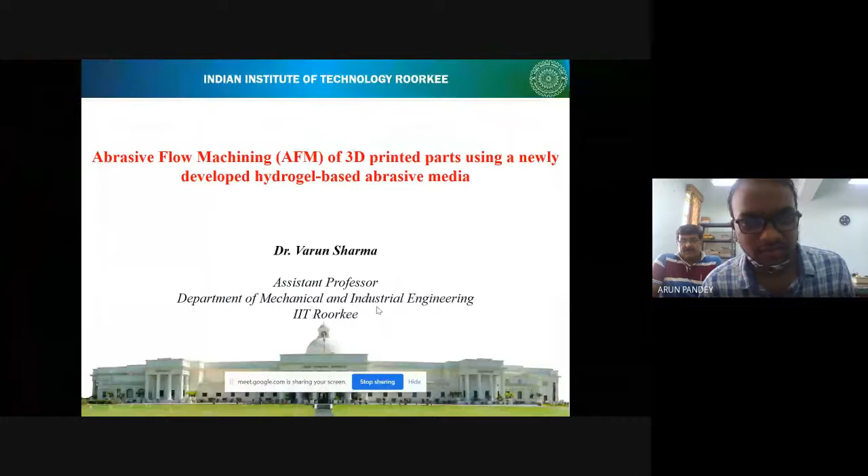The topic I have taken up for this FDP is abrasive flow machining of 3D printed parts using a newly developed hydrogel-based abrasive media. This is a topic on which we have got 2 patents. I will first discuss what abrasive flow machining basically is, how material removal occurs, and what have been the different variants and process parameters in AFM. Then I'll discuss what our guiding force was in developing the abrasive media, and how we were able to achieve a better surface finish for 3D printed parts. That will be a case study I will discuss.

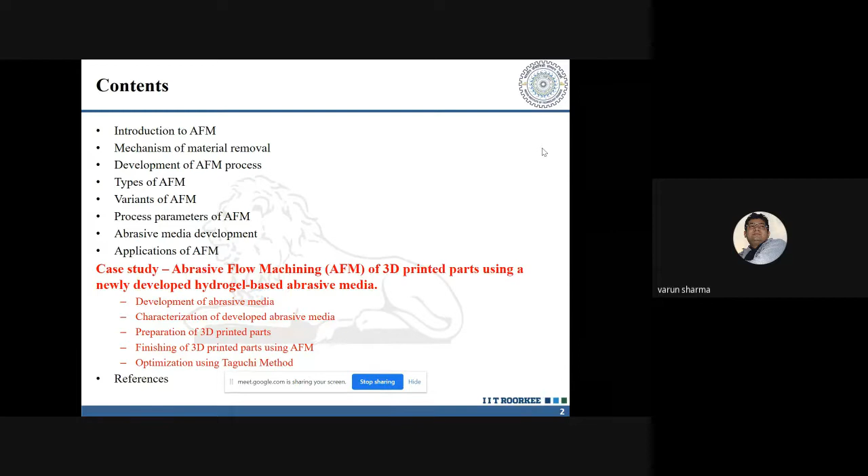Starting with it, as we all know, abrasive flow machining is one of the non-conventional machining processes in which we get the desired surface finish either at a micron or nano level. There are a number of parameters that play a significant role in selecting what kind of surface finish we are going to have. Finishing is generally taken up at the last leg of the manufacturing cycle, and this is the most significant step as it determines the surface integrity, the fatigue life of your specimen, and the performance of that particular object for its actual usage.

So till date, there have been a number of conventional finishing processes used, like grinding, honing, lapping, but they all had some limitations in the finishing of free form surfaces. They were mostly used when finishing cylindrical or simple shapes.

Like I am having certain disturbance, someone's webcam, or I think so, audio is on. Is it with me only?

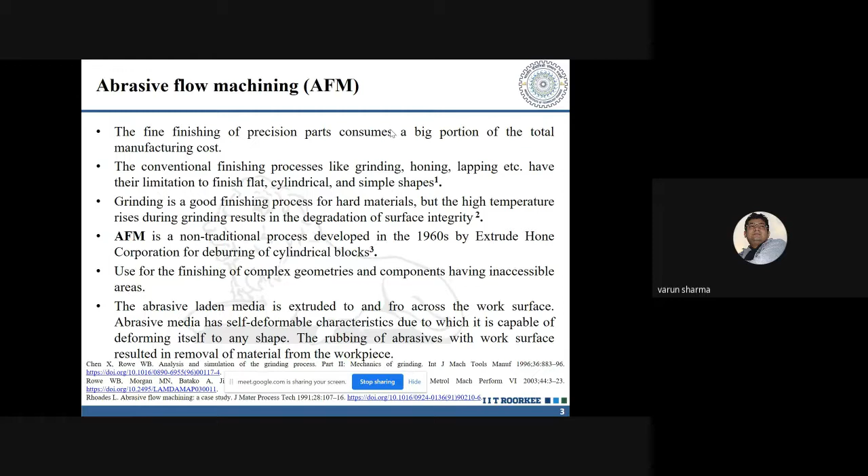With this particular process, the abrasive particle gets the freedom to take any kind of shape. The media we use is deformable in nature, which was not the case for grinding, honing, and lapping. When this media comes in contact with the workpiece, material removal starts using micro ploughing and micro cutting operations.

That abrasive media is viscous enough that it can change its shape. Primarily the abrasive medias used till date were all rubber-based, either natural rubber or synthetic rubbers. In those rubbers, you embed abrasives of a particular mesh size, density, and shape.

When that abrasive media moves from the upper cylinder to the lower cylinder, which holds a fixture, whatever is the shape of your workpiece - cylindrical, free form, or any other shape - the abrasive media creates a ploughing action, a micro ploughing or micro shearing action, and the material removal takes place at the micron level.

During this process, in a two-way AFM, the abrasive media moves from the upper end to the lower end, then from the lower end back to the upper end. So there are a number of strokes being used.

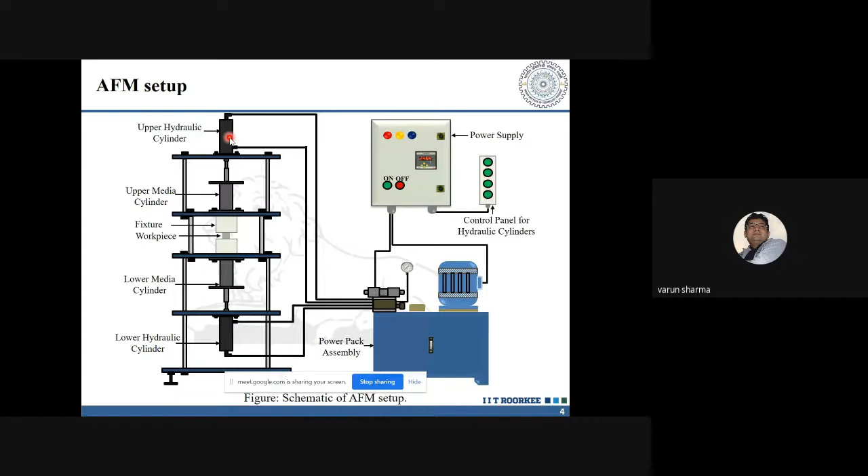The mechanism of material removal involves loose abrasive particles. Some of these particles move towards the center, and some impinge against the workpiece. So we classify the abrasive particles as active and inactive abrasive particles. When this abrasive media passes through the cylindrical surfaces, the portion that actually gets in contact with the workpiece is categorized as the active abrasive particles.

This active abrasive particle is subjected to two different kinds of forces. The first is a normal force that tries to embed the abrasive particle into the workpiece, and the other is the axial force, which is governed by the movement of the abrasive media from the upper cylinder to the lower cylinder.

During this normal force and axial force, certain debris will come up, which we call micro debris, and that debris gets into the abrasive media itself. This debris will be directly proportional to the normal force that the abrasive particle has with the workpiece.

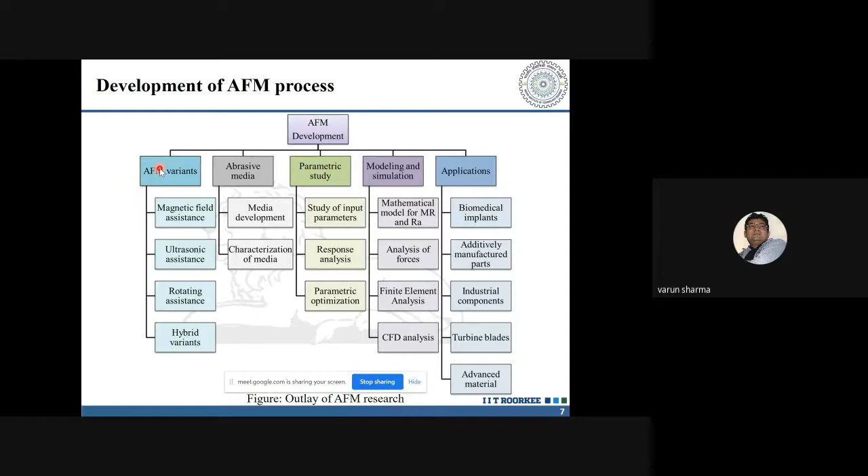So the problem we took up is that we wanted a certain finishing process for an additively manufactured material, and we wanted the surface finish suitable for the practical use of that object. So for the additively manufactured part, we developed specialized media, and we developed a certain variant for getting the desired surface finish.

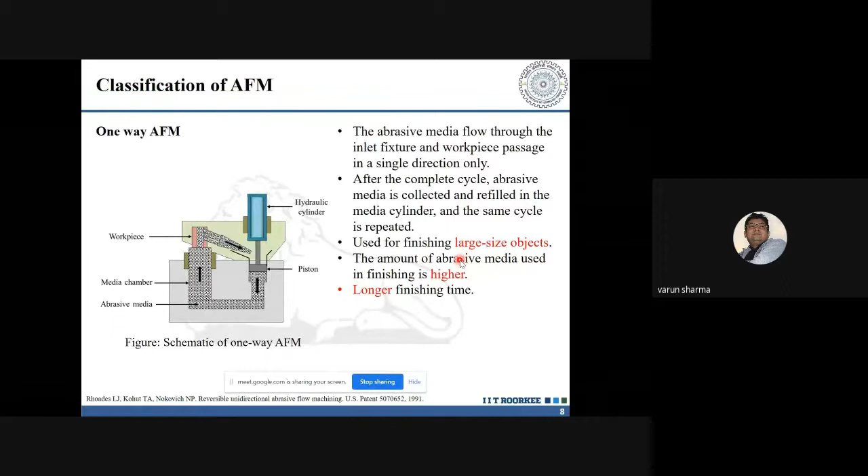Even if you have smaller sized work materials, as we had in our case of 3D printing, for complex design.

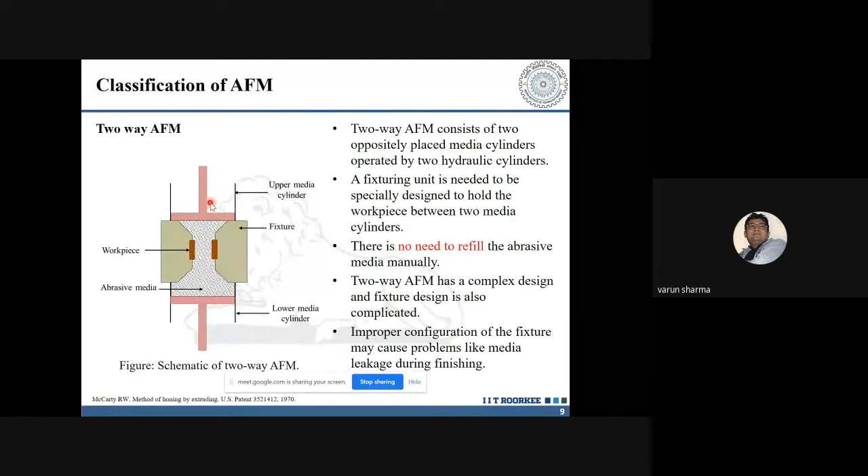However, the problem here is that there could be certain abrasives that can leak out from this process if the fixture you have designed is not appropriate.

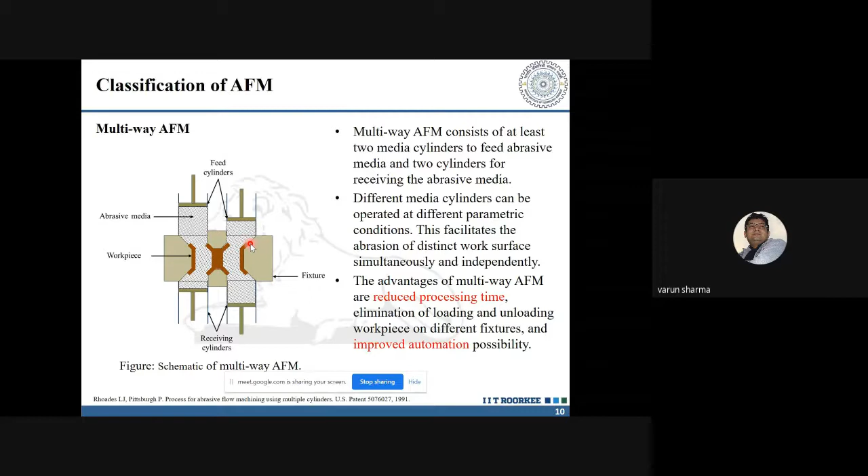Now, to increase the processing, you could use multi-way AFM, a number of cylinders that can be operated simultaneously as well as independently. This was used when we wanted to go for mass production.

Then there was another idea taken into consideration. What they wanted is that whatever inactive abrasive grains are there should also become active. Now, how can they become active? For that, they provided orbital vibrations to the workpiece. When those orbital vibrations were provided, the abrasive media gets churned up, and whatever was inactive abrasive also becomes active abrasive particles.

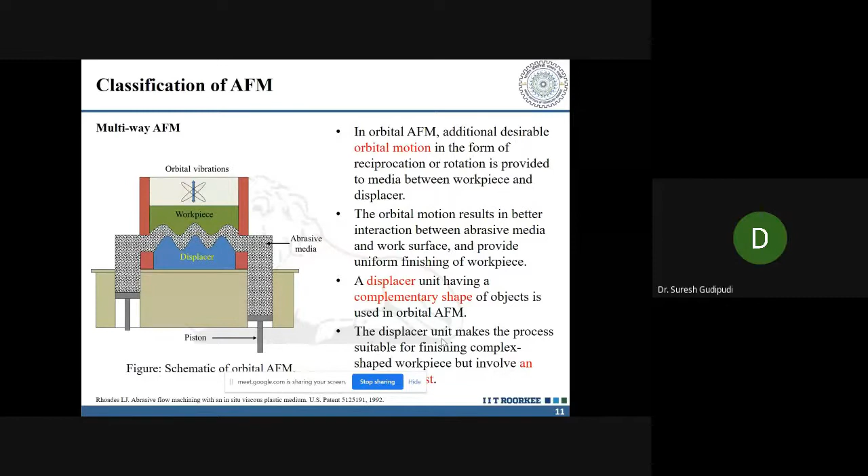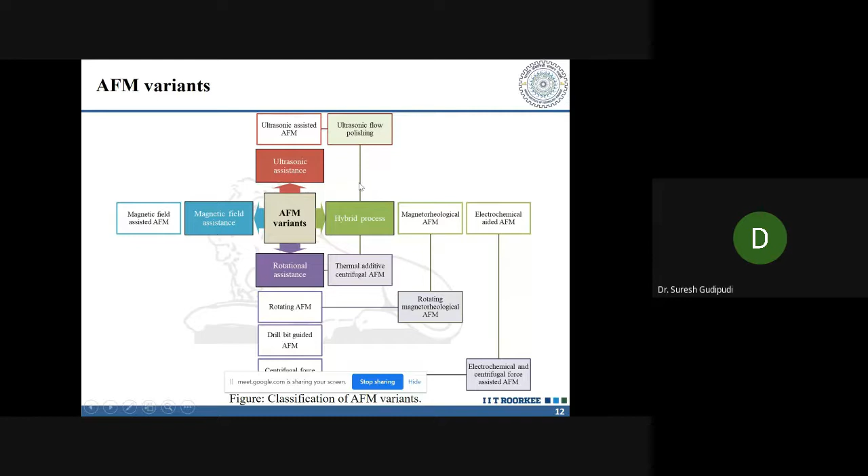Okay, so over here, what we were discussing is that there has been a number of variants of the AFM that has been developed.

For example, there has been certain ultrasonic assistance that has been provided to the workpiece. This ultrasonic assistance helped in creating a more impact of the abrasive particle into the process. So that was called an ultrasonic assisted AFM.

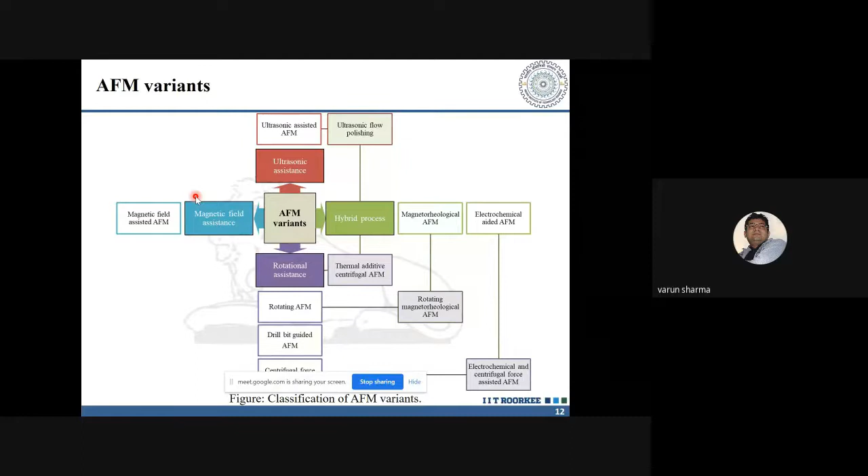There has been certain magnetic field assistance provided. That magnetic field assistance helps in pulling up the abrasive particles towards the workpiece. It creates a more normal force, and the process was called magnetic field assisted AFM.

There was certain rotational assistance provided to make the inactive abrasive particles also active. It helps in creating a churning action in the abrasive media. So that rotational assistance, we call it rotating AFM.

This rotating AFM had different ways. I can churn up that particular media using a number of processes. We used drill bits, which also provided a centrifugal force. So we were having certain centrifugal force assisted AFM also.

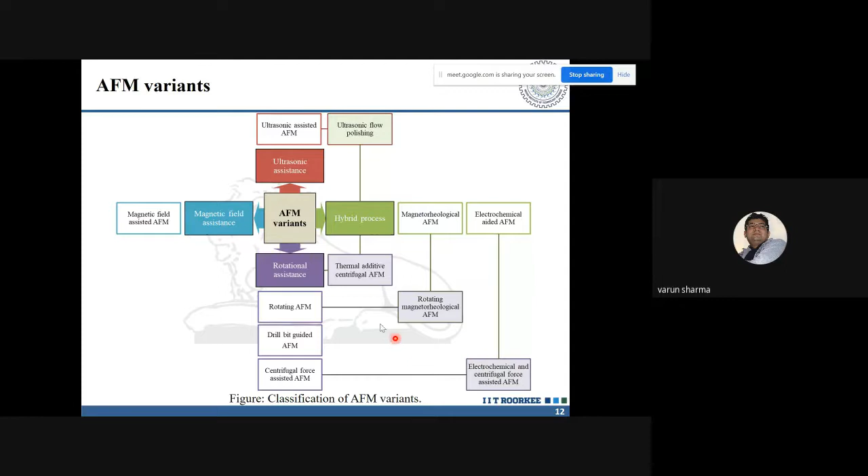Besides that, we combined certain rotational assistance with ultrasonic assistance. These two combined assistances we called hybrid processes. These hybrid processes were different - magnetorheological AFM, electrochemical aided AFM. So there were two or more combinations of separate processes combined with each other, and all these variants came into existence.

Now moving on to slide number 13. Over here, to make sure the abrasive particle creates more indenting force, we had certain piezoelectric actuators, which provide vibrations of the order of 5 to 10 microns, and the frequency was of the order of 20 to 25 kilohertz.

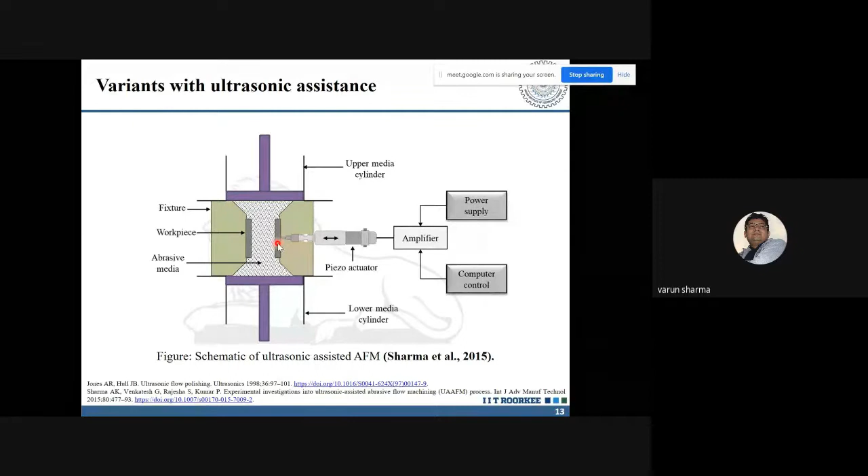With those high intense vibrations of relatively smaller amplitude, when the workpiece starts vibrating, it gets in contact with a number of abrasive particles, and when it gets in contact, the material removal rate increases in the similar manner.

Other than that, to increase the magnetic assistance or provide magnetic assistance, we provide certain electromagnets towards the boundary. Once you provide these electromagnets, whatever abrasive particles you are using, that will not be like only alumina or only silica.

No, it will also be having certain iron particles in it. So what those iron particles do is, under the effect of the magnetic field, those iron particles get pulled towards this electromagnet, and it creates the material removal at this particular end.

Now, by varying the intensity of that electromagnet, by varying the electric current, you can create a variation in the indentation of that abrasive particle against the workpiece.

So one way was going for an electromagnet. The other way was using a number of permanent magnets, which were being rotated. When they were rotated using a belt drive, it creates a churning action, or it creates a rotational motion into the abrasive media.

Another variant was the magnetorheological abrasive flow machining, in which we were using certain CIP chains. These CIP chains align themselves from north to south pole, and whatever abrasive particles are entrapped over here, that helps in creating the micro cutting and micro ploughing operations.

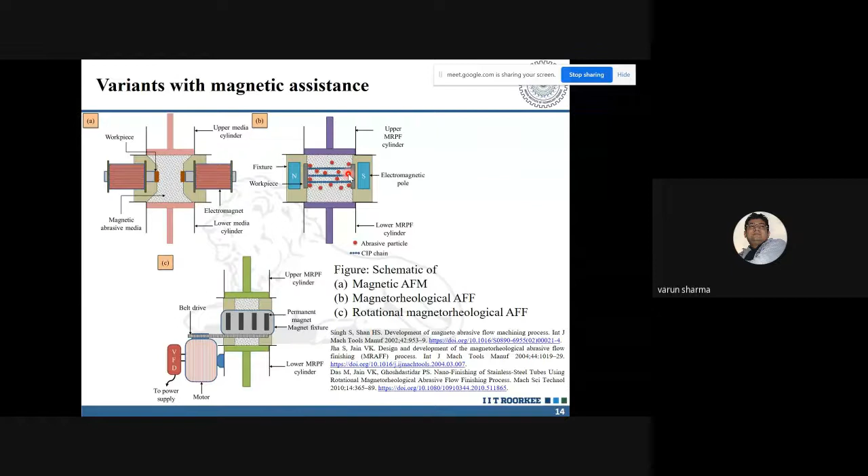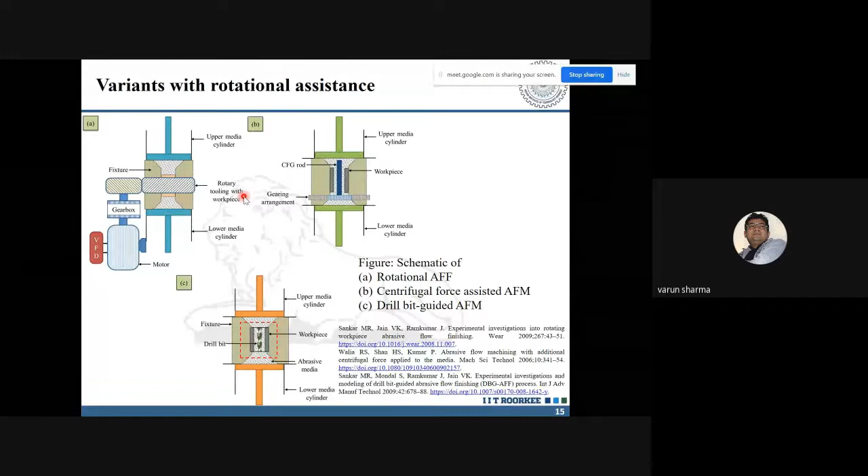Now, if I am working with any particular variant of the AFM, with the same variant, if I increase my number, if I change my abrasive concentration, mesh size, or similar, I can have different kinds of the micron or nanoscale results in that particular case.

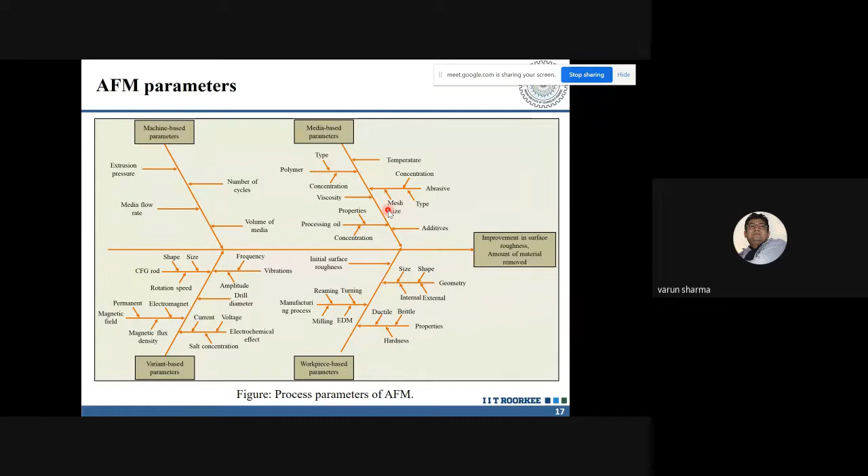So first we are going to discuss abrasive media development. This is from one of our articles from the Journal of Manufacturing Processes. So what kind of abrasive media do you want for your particular process? It was generally rubber based or natural polymer based.

Whatever media you have developed needs to be characterized before it goes for the final set of experimentation. There are different categories of media characterization techniques used: FTIR analysis, SEM analysis, TG analysis, heat transfer coefficient, amplitude sweep test, viscosity variation with temperature, flow test, and creep behavior of that abrasive.

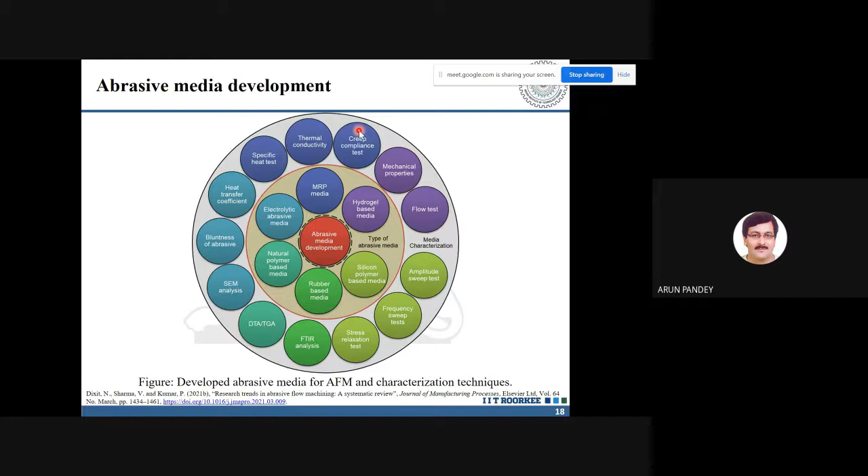Okay, now click. So this is the surface finish before the AFM, and this is the surface finish that you could achieve after.

What you can see here is that the furrow marks that were present were easily flattened out using this particular process.

Now, when the abrasive media travels from the upper cylinder to the lower cylinder, what it does is create certain marks.

If you are doing the finishing using grinding, what you will see is that the furrows created will be very sharp, so there will be certain plastic deformation of the material as it moves from that particular furrow.

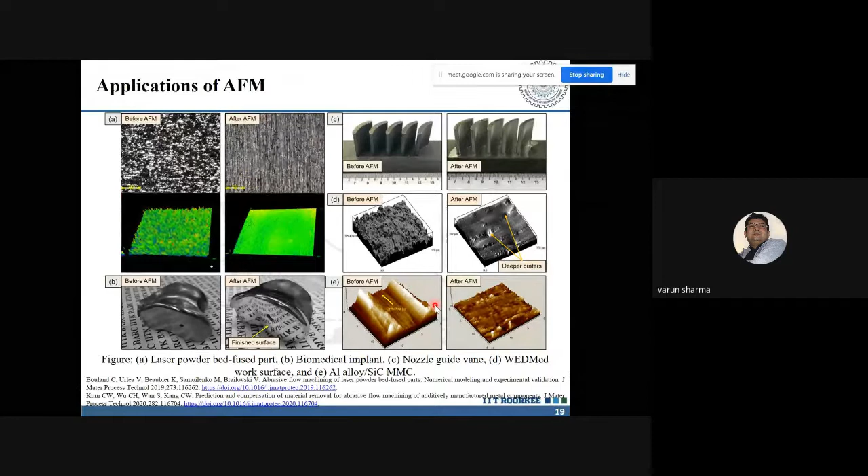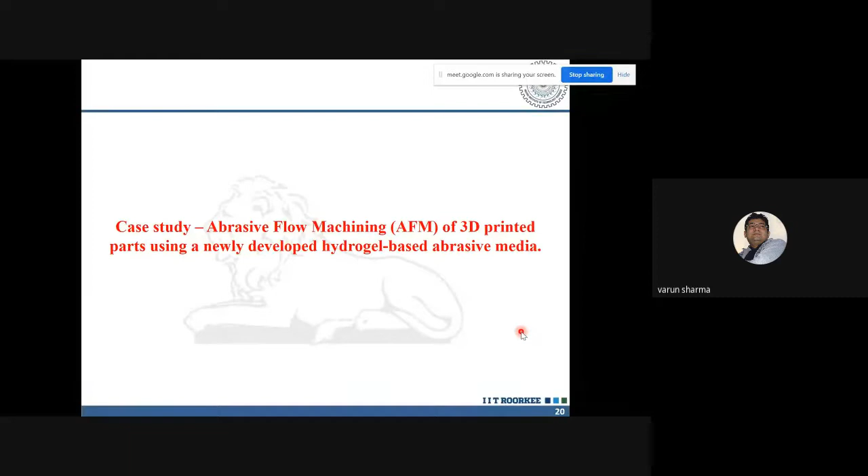That sideways movement of the material was suppressed when working with the abrasive flow machining process. Now, our target was, taking all these things into consideration, how could we go for the abrasive flow machining of 3D printed parts?

This is the schematic of the work we did here. The problem with additive manufacturing is, no doubt, it can be used for manufacturing free-form surfaces, but there has been one inherent error of additive manufacturing, and that error is called the staircase effect.

If you are creating an object which is cylindrical in shape, the staircase effect will be less. But let's say you are fabricating an object which has a dome shaped surface, like the shape of the object I have to create.

Once you create it using additive manufacturing, it is the stacking of layers one over the other. Let's say this is my first layer that I am stacking, this is my second layer, and this is the third layer.

What you will see is that the actual object you create will have a movement of layers in this particular manner, resembling a staircase towards these edges. So your desired surface was this dome shape, but once you stack up your layers one over the other, what you get is this kind of staircase effect.

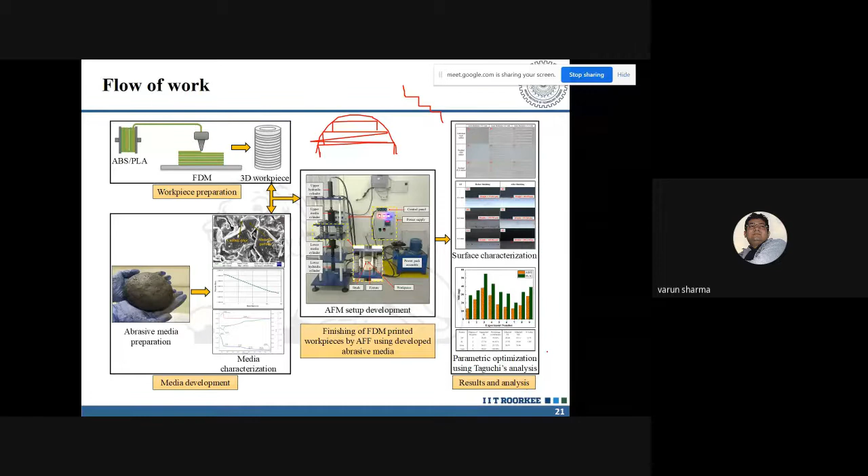Now what we did is we first developed our abrasive media. We characterized that particular abrasive media on an in-house built setup, and then characterized that particular thing using different characterization methodology. This paper we published successfully in Rapid Prototyping Journal.

The first and foremost thing that came into our mind was that we have to create a self-deformable abrasive flow media. Now when it comes to the self-deformable abrasive flow media, as I discussed earlier when we were discussing the classification, rubber was being primarily used. Now the manufacturing of that rubber-based abrasive media is itself polluting in nature.

It requires a certain setup, a hot air oven in which you can melt your abrasive rubber. Then you have to embed it, then you have to mix it manually. So that was all a very tedious task. No doubt it gave you a certain semi-solid mixture of the polymers and the abrasives.

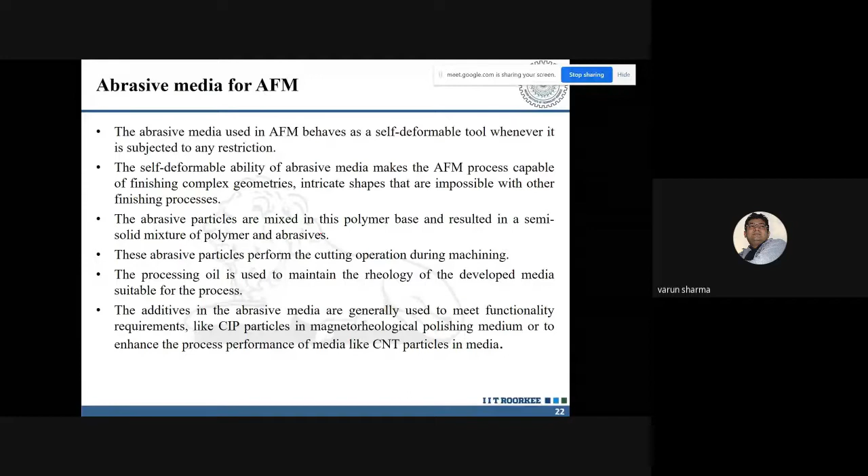But whatever this particular abrasive media is, it undergoes shear thinning when it goes to 200 cycles, 300 cycles. Slowly and slowly, the abrasive holding tendency of that particular media gets decreased, and this particular media needs to be replaced, cannot be reused again and again.

So the problem with the conventional method is that you require heating of the polymer, which requires furnaces. Also, it was human intensive, and the high temperature was not safe for human labor. Besides that, environmental issues arose because fumes were being released, and it was also a time consuming process. It will take around 6 to 7 hours to develop the desired viscous abrasive media using natural or synthetic rubber. Also, whatever debris is created during the process will come into the abrasive media.

So let's say you have gone for 300 cycles or 600 cycles, your media is not pure. Your media will have certain kinds of debris that have come from the workpiece. So you have to change your abrasive media because it has certain blunt abrasives and also a kind of debris, which was again costly. So I cannot change my abrasive media after 300 or 600 cycles easily if I'm going to go for production.

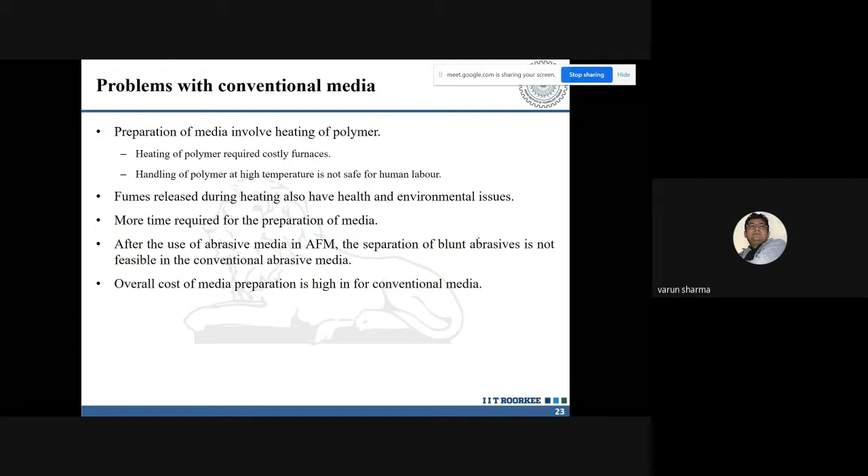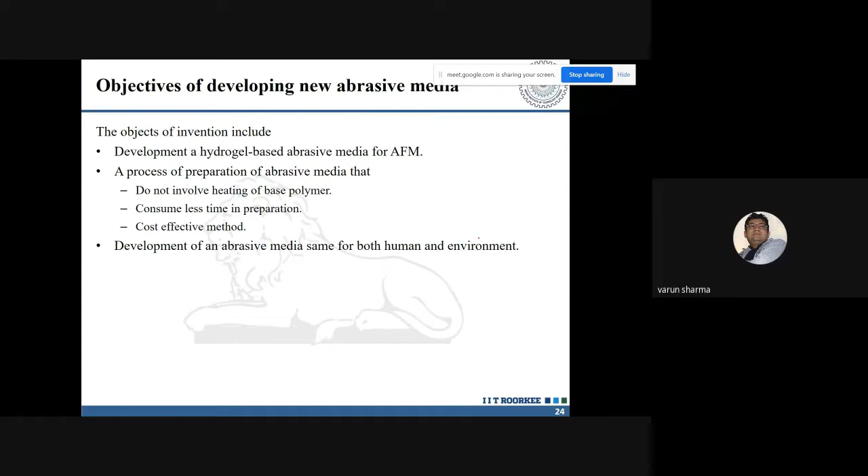So taking all these things into consideration, the objective was to develop a hydrogel based abrasive flow medium — a media which does not involve heating, requires less time to prepare, and is cost effective and safe, not only for the human but also for the environment.

So taking that into account, for the media development we used xanthan gum. It is biodegradable, biocompatible, and has good strength. Now, to make sure that this xanthan gum cross-links nicely, we used a cross-linking agent called locust bean gum. It was not having the desired kind of viscosity to hold up the abrasive particles, so we used fumed silica to give it the desired thickness, and then we went on to mixing the abrasive particles into that particular fabricated abrasive media.

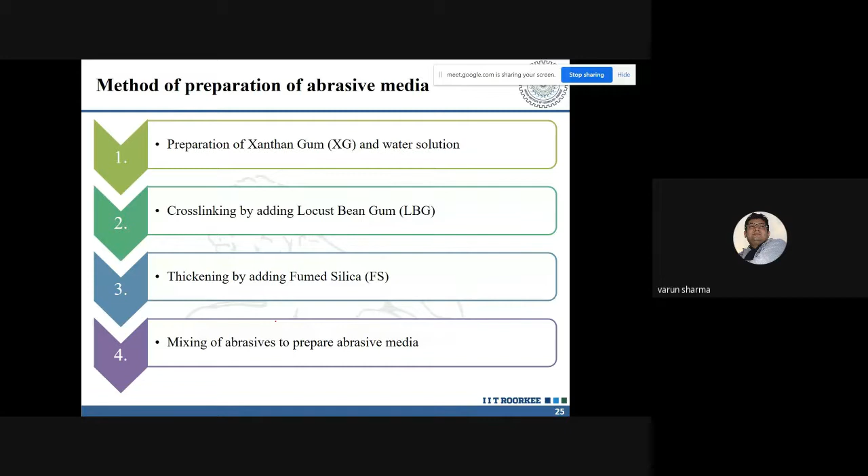Now, before using it for the actual material removal, because if I have to achieve a micron or nano level surface finish, my abrasive media should be held at a certain temperature for a longer duration, to make sure we characterize this particular media — because only then could we attain a micron or nano level surface finish for the 3D printed object.

We tried to characterize it using 5 different constituents. The case was that we used xanthan gum, locust bean gum, fumed silica, and water to have the desired constituents.

Now, to determine the rheology, we went for the amplitude and frequency sweep test. What we found is that as the shear rate increased, the viscosity decreased. That was what we were expecting, and it was characterized due to the shear thinning behavior of that particular abrasive media. This shear thinning was on a higher end compared to the conventional natural rubber media that we were developing.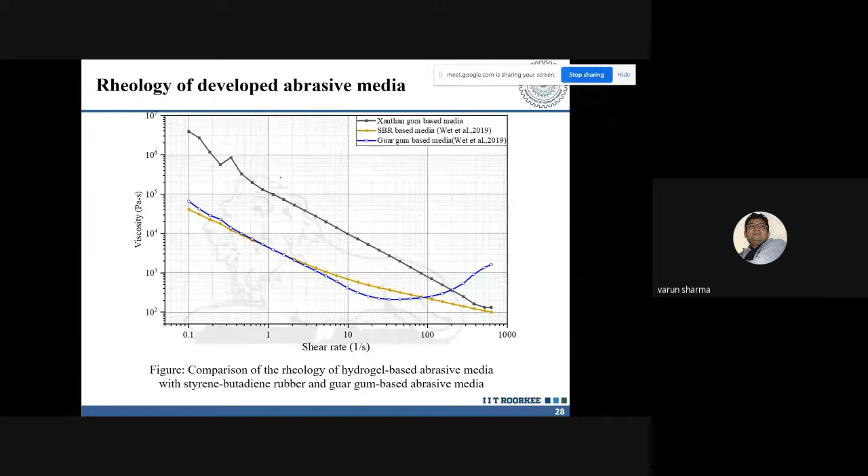Now, as compared to all this, the viscosity for our media was higher. Because the viscosity in our case was higher, we took into consideration that this is the media that can have a better cross-linking, and can help in a better material removal process. So rheologically, this was the best media that has been developed in the literature. That was the reason we patented this particular media.

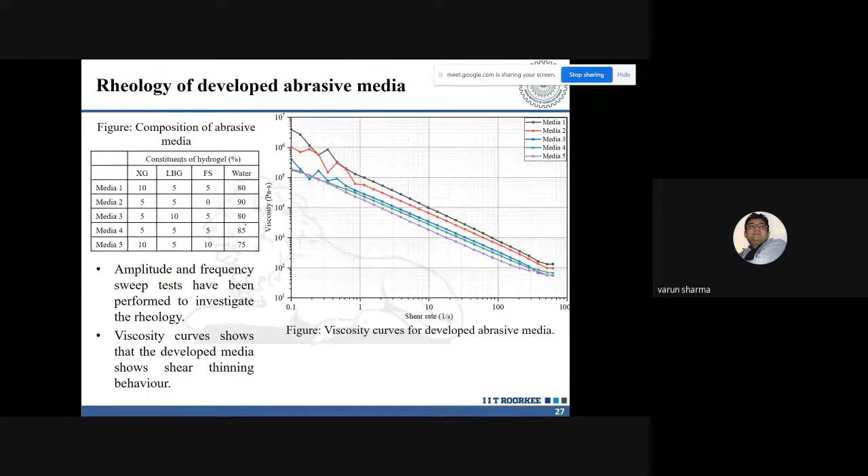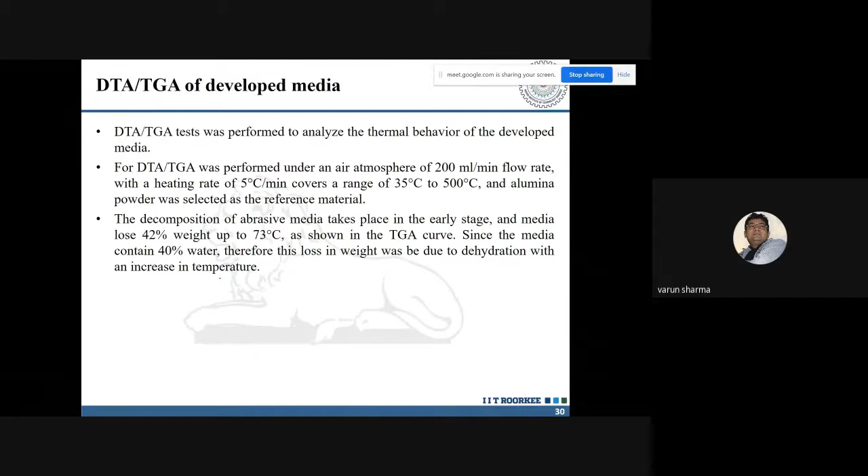So these presences resulted in an elastic nature of the polymer based abrasive media. Now this elastic nature is one of the desired properties from the abrasive media, because it gave it the desired deformable characteristics so that it can get the desired surface.

So the advantageous features of this particular abrasive media is that it is stable for the operational temperature range of the AFM. The viscosity of the abrasive media was higher than that of the conventionally used media. So whether you are going to get the desired finish in titanium or relatively softer materials like ABS or PLA based material, this particular abrasive media can be used. There was no use of furnaces, no use of manual labor, so it is safe for use as well as environmentally friendly. There is no costly equipment required. The rheological properties are similar to, rather better than, that of the conventional case.

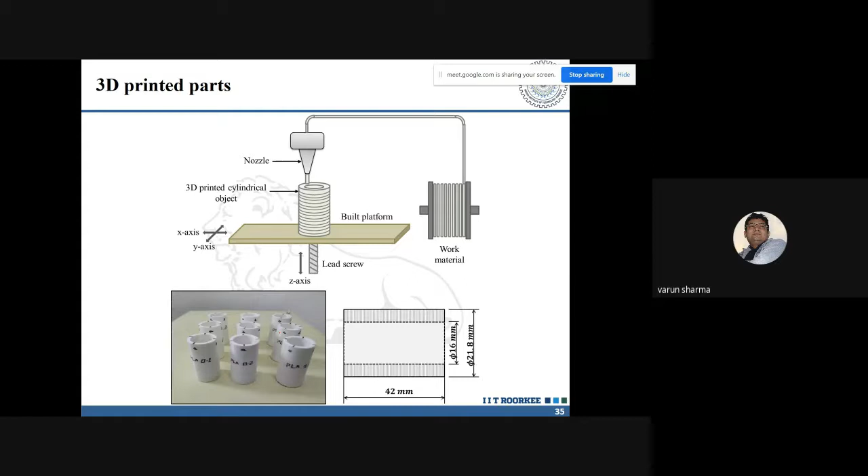So one idea was to get up this particular 3D printed part, using the same kind of schematic setup we used earlier. Now there are different parameters that we tried to optimize. For example, we went for different parameters: the layer thickness, extrusion temperature, extrusion pressure, and the abrasive concentration.

Now, the layer thickness that we varied was from 0.1 to 0.2 to 0.3. For 0.3, there was more staircase effect. For 0.1, there was less staircase effect. So if the workpiece I am going to finish has a higher staircase effect at the initial level, the percentage improvement in surface finish will also be on the higher side.

The extrusion pressure we varied from 60 to 100. This helped in creating a variation in the axial forces by which the abrasive particles moved from the upper cylinder to the lower cylinder. And there was an abrasive concentration. Now, we have not used any magnetic assistance, none of the ultrasonic assistance. It is simply pure abrasive particles that have been used.

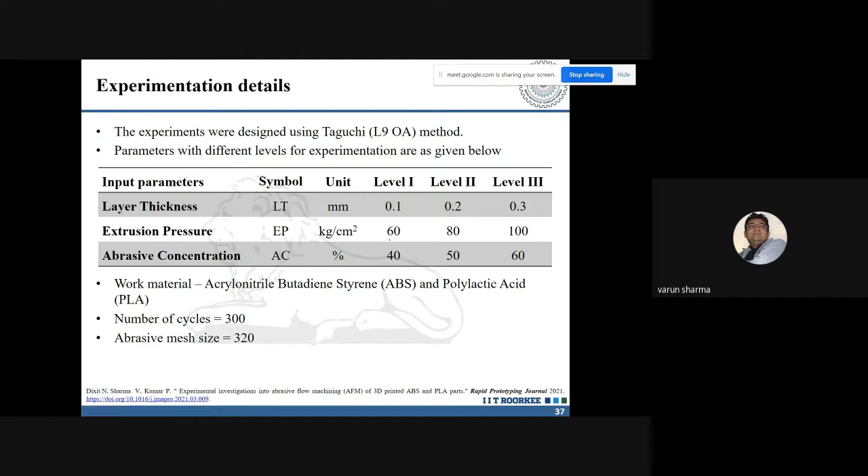Now, if your abrasive particle concentration is on the higher side, let's say I move from 40 to 50 to 60, it is not going to give you any particular benefit. So all these parameters were selected through pilot experimentation, and an L9 orthogonal array was made up.

Through this, the process output that we took was the material removal. Mind it, we did not take the material removal rate here—it is the material that has been removed from the workpiece. That is, initial weight of the sample minus final weight of the sample, and whatever the difference is, that has gone into the abrasive media, because it became part of the medium moving from the upper cylinder to the lower cylinder.

The other output was the percentage improvement in surface finish, calculated as initial surface finish minus final, divided by initial, into 100. Now, the reason we don't measure the final surface finish alone and report it that way is because it depends upon a number of parameters. For example, if my initial layer thickness is 0.3, I will have more scope to remove material. If my initial layer thickness is 0.1, the staircase effect would be less, and I will have lesser scope for material removal for the same abrasive media.

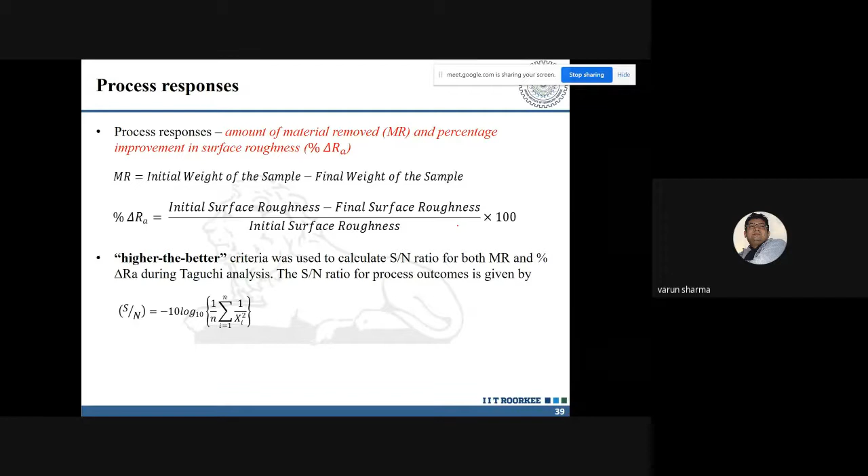So we want both: material removal should be higher, and the percentage improvement should also be higher. So for the Taguchi method, we went for a 'higher is better' kind of approach, and these were the characterizations for the different sets of work materials, that is for ABS as well as for PLA.

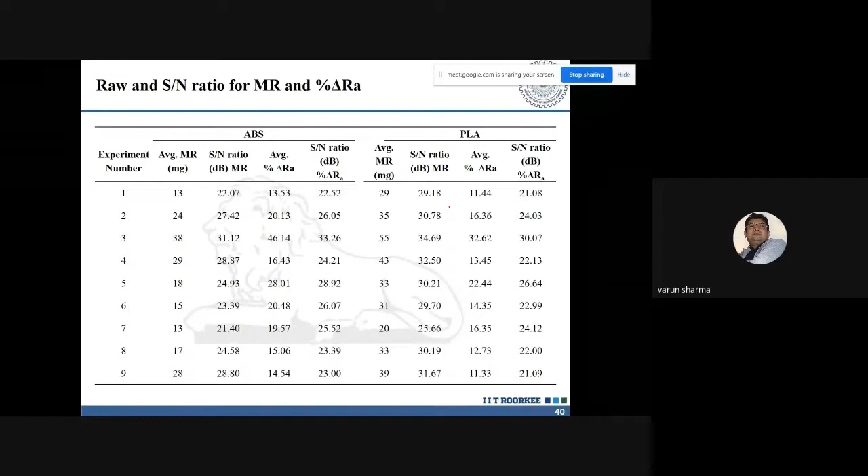What you could see from here is that as compared to ABS, the average material removal was higher for the same set of experimentation for PLA, because it was relatively softer in nature. However, there was a contradictory experience, and that contradiction came up on the average surface roughness, which was higher in case of ABS and lower for the similar set of parameters in case of PLA. So what is happening in the process?

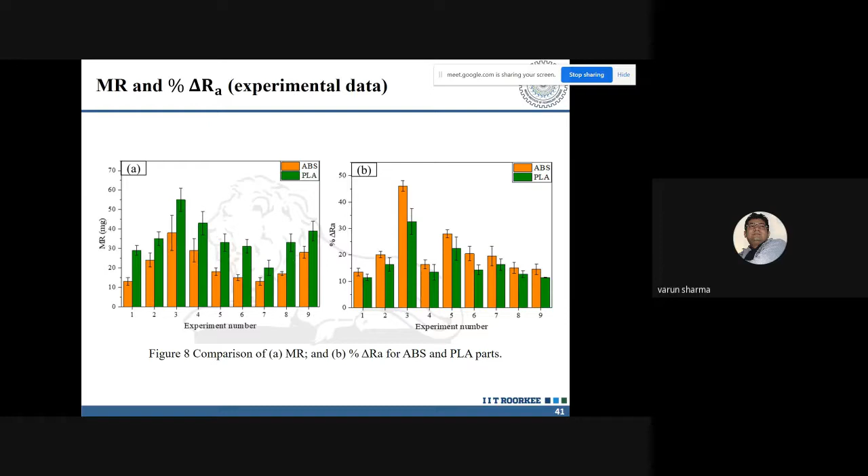For all these sets of experimentation, you see that the material removal rate was higher in case of PLA. For some parameters it is less, for some it is more. It was best for condition 3.

Now just look at the cross-sectional view of the surface finish. For the layer thickness of 0.1 mm, the consecutive layer thickness is 100 microns. Over here it is 201 microns, that was for 0.2 mm, and over here it was 301 microns for the 0.3 mm layer thickness.

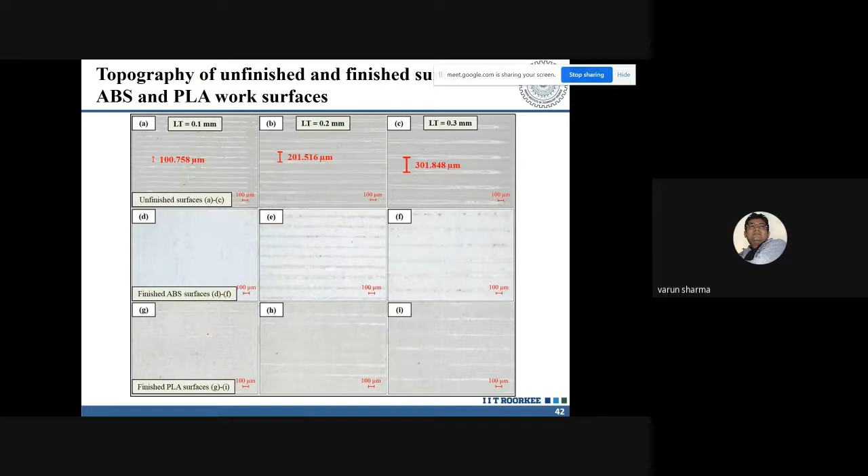Now as you moved for the ABS, you see that whatever furrows were easily visible here have already gone away. For 0.2 it was less, for 0.3 they were still visible. So for the 0.1 mm layer thickness, a better surface finish has been achieved for the ABS as well. Now when you look towards the cross-sectional view, see over here that this is the material that was being stacked.

That material was being stacked in the form of domes, this kind of shapes were being there. Like this was first layer, second layer, third layer. So what we were having is we were stacking up these particular domes over the other, from a reference line.

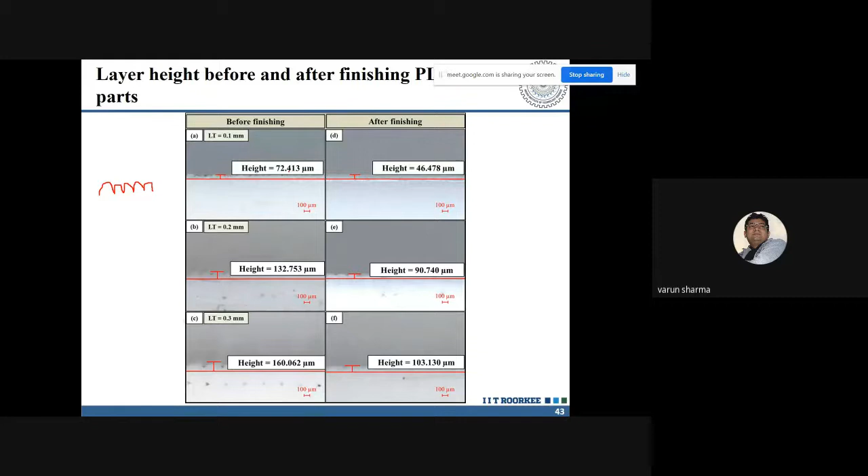Now this particular stacking was 72 microns. As the material removal occurred, some portion of the domes was being withered away, eroded with the abrasive particles. So we were able to reduce this particular height from 72 to 46 microns. For layer thickness 0.2, from 132 to 90 microns, and for 0.3 from 160 to 103 microns, you were able to reduce for the PLA finishing.

So if we look towards this particular input, that were 3: the layer thickness, extrusion pressure, and abrasive concentration. Now this particular increase in the layer thickness resulted in more surface irregularities.

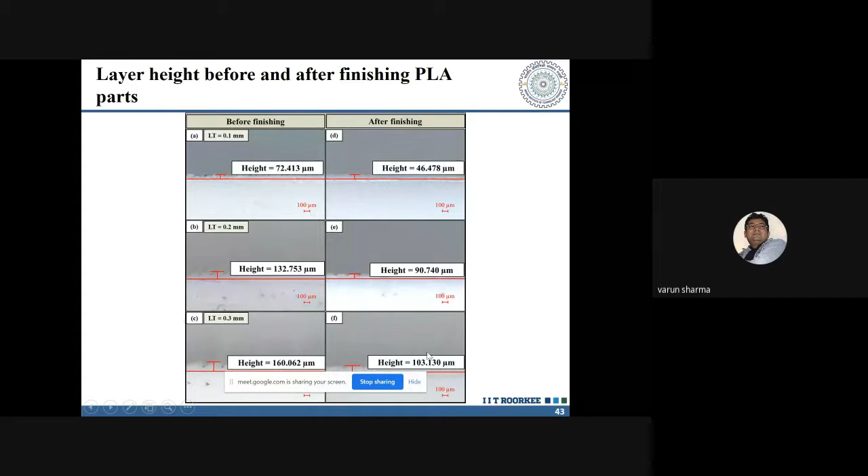So the effect of these particular input parameters on the material removal rate is, what you could see here is similar kinds of trends have been achieved for ABS as well as for PLA work material. Now in case of ABS, what we found is that as the layer thickness increased, the material removal decreased. This is generally because of the fact that for 0.1 mm,

the stiffness of the additively manufactured part increased with the layer thickness. So as your layer thickness increases, the material becomes more rigid. Now as the material becomes more rigid, the material removal is decreased in a similar manner.

Now, similarly, whatever irregularities are present at a relatively lower layer thickness can be easily sheared off because that was having a lower stiffness. So that was the reason that for 0.1 mm, the material removal was on a higher side.

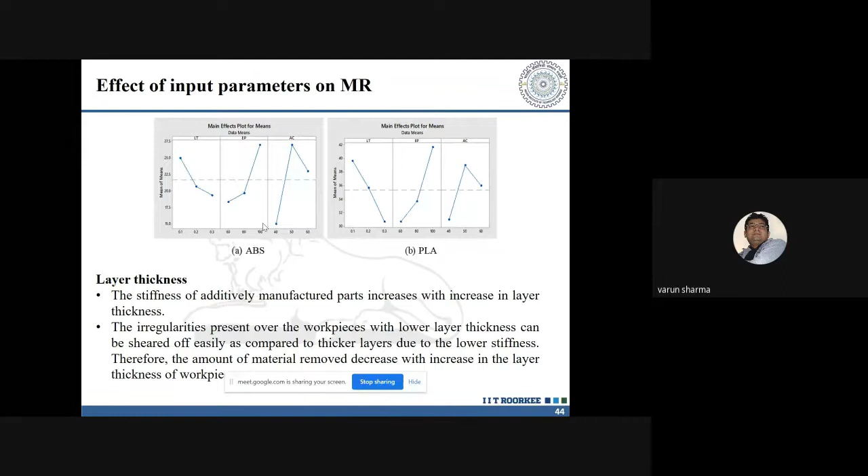Similarly was the case with the extrusion pressure, that as the extrusion pressure increased, the material removal increased gradually. Now, the study of these parameters was primarily important because we need to optimize them if I want to achieve a micron or nano level kind of surface finish. So you have to play with these parameters only, then that micron or nano finishing can be achieved for the additively manufactured part, because these parts are relatively peculiar in their characteristics. It may be harder at the end, since this is a plastic kind of material, while towards the bulk it may have already a different kind of surface properties.

So the abrasive concentration that we were having from 40 to 60%, what you were seeing is that material removal was on a higher side, but it dropped when you moved from 50 to 60%. Now the reason for that is the flowability of the abrasive media decreasing. When the flowability decreases, it results in a higher degree of bluntness, because the abrasive particles start colliding against each other, and when they collide, the bluntness increases and the material removal decreases in that similar manner.

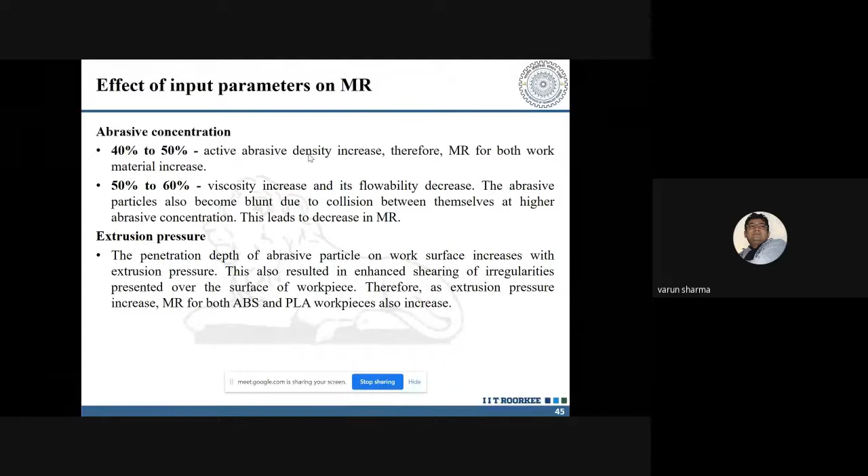Now, the extrusion pressure was directly proportional to the axial force. So if I increase the extrusion pressure, the axial force will increase in the similar manner. A similar kind of trend has been achieved for the input parameters on percentage del RA. So what we found from this is that there was more scope for material removal.

However, there was not much improvement for the 0.3 mm layer thickness. Similarly, for the case of extrusion pressure, and the abrasive concentration, it resulted in a better smooth surface for both ABS and PLA.

We did an analysis of variance and found that the extrusion pressure was the most significant parameter when you considered ABS. For material removal and for RA, there were different parameters that contributed. Now, this was the work that we contradicted with the initial findings.

There was one report, a recent work, that said all the parameters are significant. Whether you work for ABS or PLA, irrespective, your extrusion pressure is significant, layer thickness is also significant, abrasive concentration is also significant — which is not the case for the additively manufactured part, at least. So the reason for that is that this is a plastic-based media, polymer-based media.

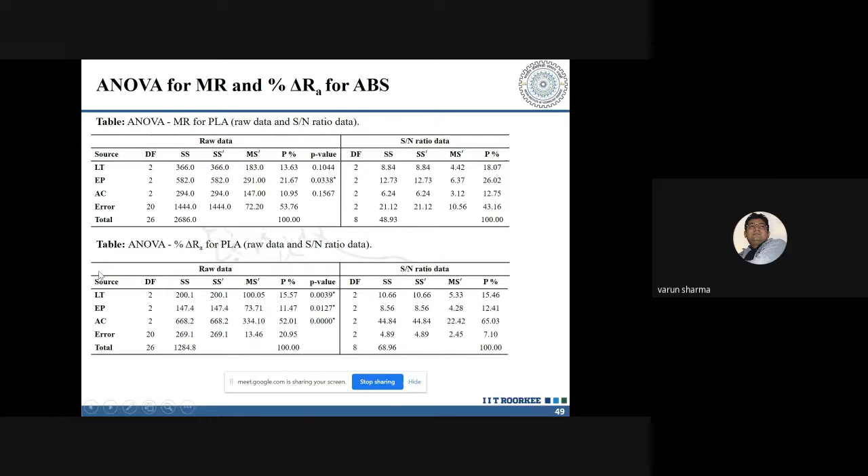And similarly, for the PLA case, it was just the extrusion pressure for material removal, and for the percentage del RA, all three parameters came out to be significant. Now, these are some of the signal to noise ratios for this particular thing.

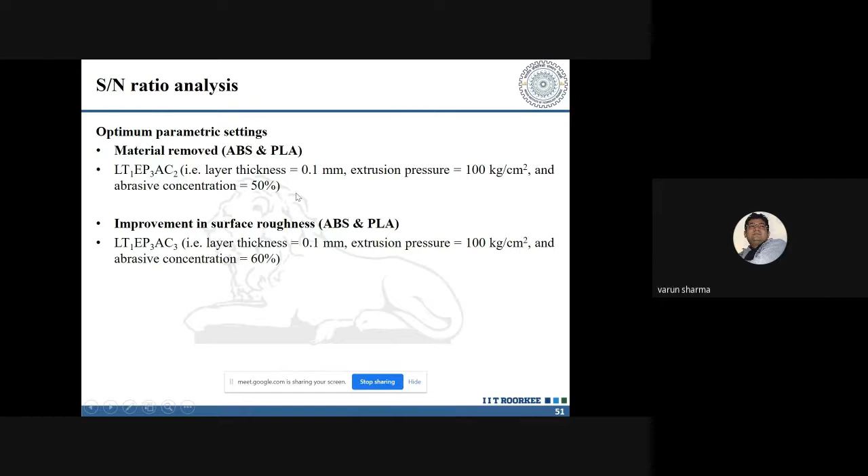Now, we optimized this, and what we found is that a lower layer thickness of 0.1, higher extrusion pressure, and a medium concentration of the abrasive at level zero — neither minus one nor plus one — is going to give you the best material removal rate. And for the surface finish, it is 133 that is going to give you the better kind of surface finish.

Now, with this experimental study that was done, AFM was found to be one of the most effective methods for the 3D printed part. For the commercially available emery paper, some people dip their additively manufactured part in wax and say that coating has been done and the surface finish has been reduced. So as compared to the traditional methods, this is the non-conventional methodology that can be easily used, because you cannot use ultrasonics for ultrasonic finishing.

EDM you cannot go, you cannot do ECM over here because these are plastic kind of processes. So AFM is the most promising technique in the near future, which can be used for the finishing of 3D printed parts. The hydrogel media that we developed for this experimentation was environmentally friendly, rather a sustainable media that we were having, and we were able to get the desired kind of surface finish in terms of PLA and ABS.

Now, the percentage improvement that we were having - for example, for a relatively softer material, we were able to improve the surface finish by 52%. Whereas for ABS, we were able to improve the surface finish by 31% as compared to the initial.

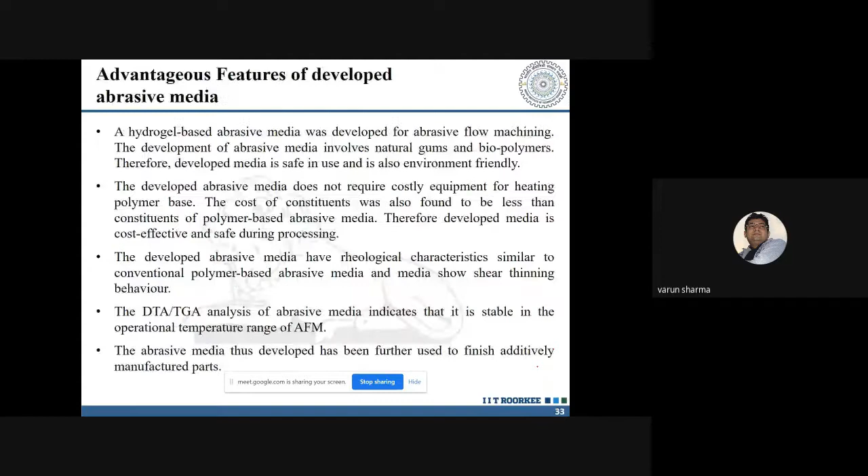Now what's the case over here is that if we are using permanent magnets, I cannot change up the normal force. So if you see this particular slide, let me just take you back to the schematic.

Yes, over here. Could you see slide number 5? Yeah, could you see slide number 5? Hello? Hello? Okay.

So the idea was to change the trajectory of this particular abrasive particle. Now, when we used a permanent magnet, I cannot change the magnetic field intensity - if I am changing it, I am going to invest into my setup. The other way was trying to develop an electromagnet, because I can change the magnetic field intensity from 0.1 to 0.2 to 0.3 Tesla. If you go for a higher end, you can go for 0.5 Tesla kind of magnetic field intensity in that case. So what I wanted is, I wanted to have a higher normal force.

Now for creating this normal force, I used a magnet. I want to have a higher axial force - I can control it using extrusion pressure. I want to make these inactive abrasive and active abrasive particles, and for that, what we did is we provide a churning action. So we call it a rotational ultrasonic assisted magnetic abrasive flow machining setup.

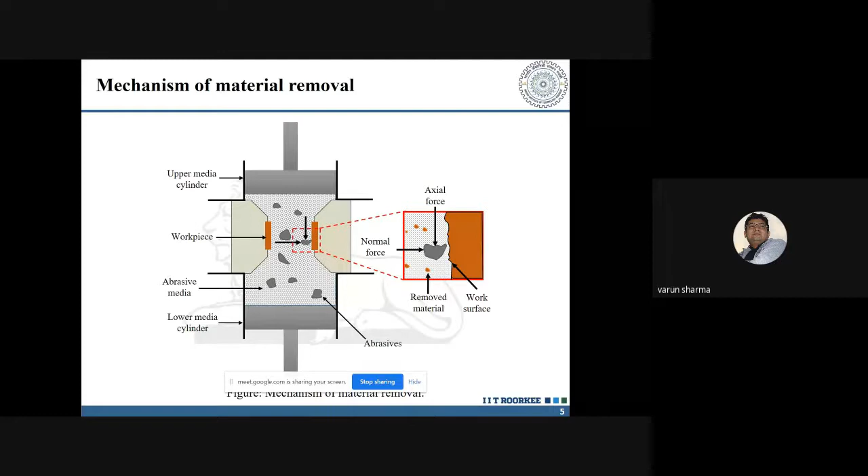Now, when it comes to materials having stringent mechanical properties, for example nickel, titanium-based alloys, ceramic, which are categorized as the super alloys, in that particular case the assistance is being better provided in that context.

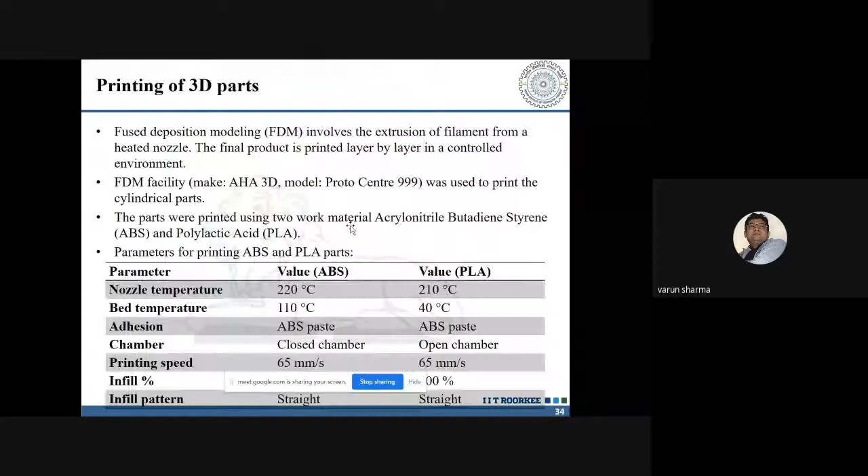So what we did is we tried to develop up this particular setup.

So we used a programmable logic controller, PLC, and an SSR relay was being used so that an intermittent power supply can be used, because the electromagnets cannot be used for 300 cycles continuously. You have to provide a certain cooling down period.

Now, one way of the cooling down period is you can use a water-cooled electromagnet, but that is going to create a much larger cost in the equipment. So what we wanted is to provide intermittent operation.

Like we have intermittent cutting in milling, which provides certain relaxation onto the tool, we used an intermittent operation. There were 4 magnetic poles, and those magnetic poles were being switched from one end to the other. So when this one is active, the others are stopped.

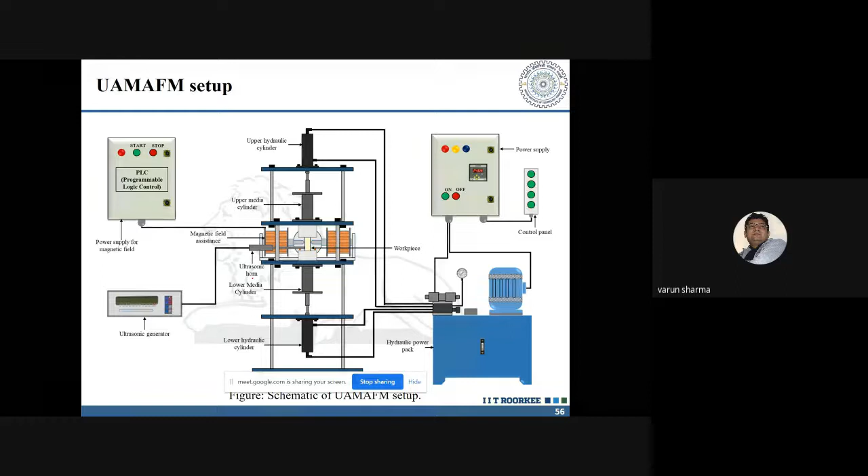So your abrasive particles start moving in a circular manner. This is the schematic of that particular process, and we are in the process of finishing certain titanium and nickel based alloys using this kind of setup.

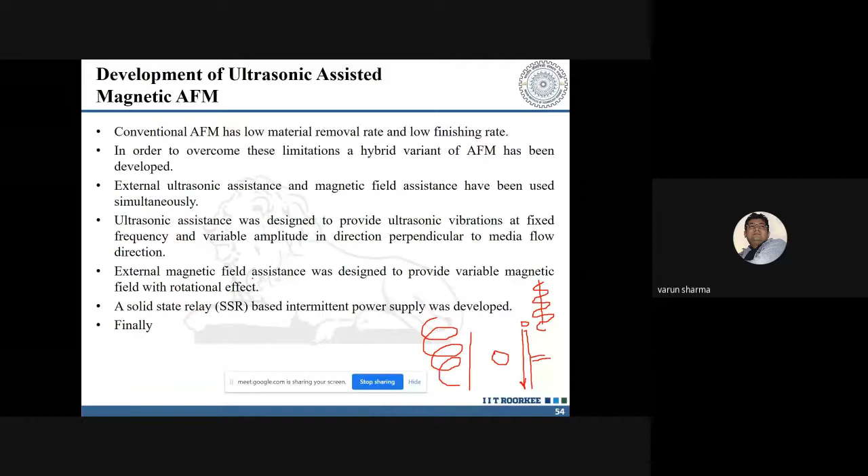The other development that we did over here is the media. The rubber media that was being primarily used earlier was being thrown away or discarded into the atmosphere. Now, with the media that has been developed over here, you have to just put that particular media into water.

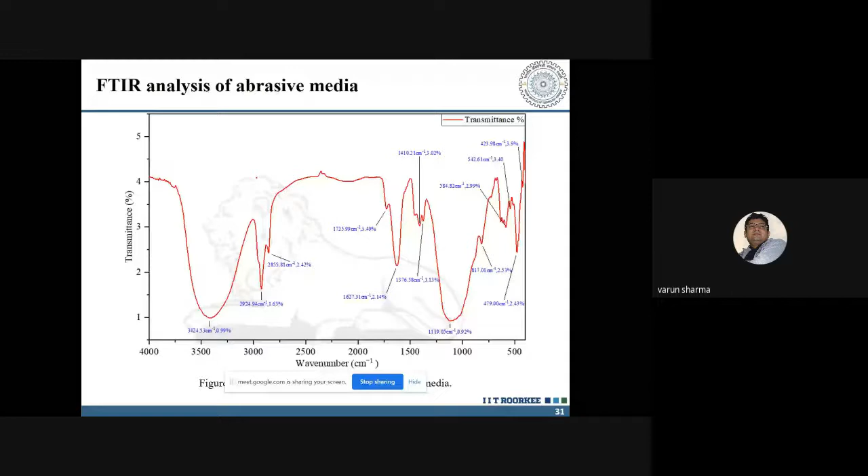Once you put that media into water, give it 2 to 3 hours. Whatever polymer is there will come up onto the surface, and whatever used abrasive or debris is there will settle down onto your glassware. So you can easily go for removal of the debris from the abrasive media once you've done that.

So all the disadvantages of that earlier method were easily eradicated using this particular setup.